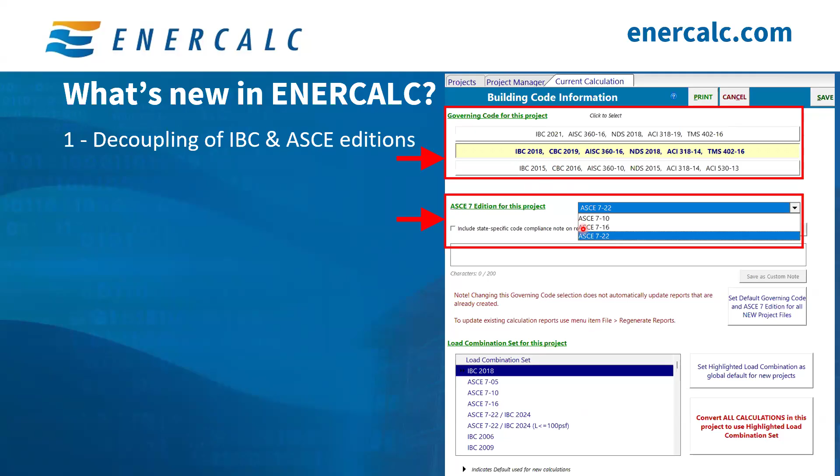So the third exciting update that we want to talk about is native load linking within ENERCALC. So hopefully this is familiar to some of you, but if it's not, load linking gives the user the ability to automatically link reactions from one calculation to another, and the ability to change something in one member and then have those changes trickle down to all the supporting members.

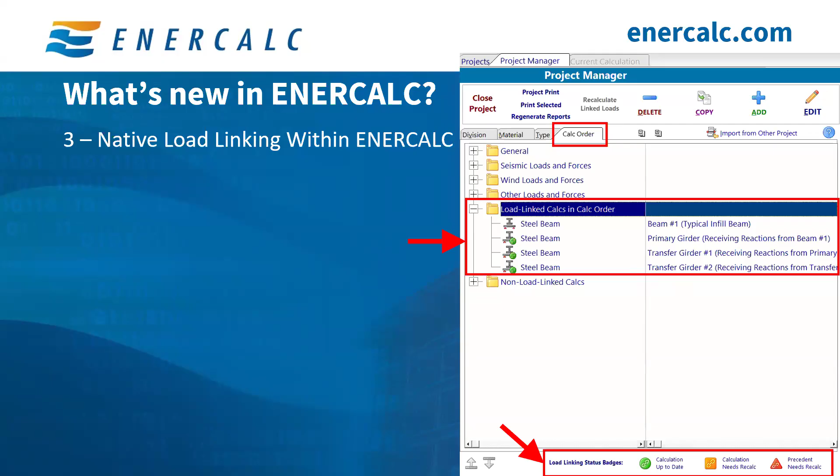So you can link multiple reactions from multiple members at the same time, and ENERCALC is going to understand the load path logic and ensure that all calculations are performed in the order that they should be. And then at the bottom of our screen, we can see these load linking status badges. So these are going to help you navigate the status of each calculation and understand the warnings better.

So for example, if we were to update our beam number 1, we'd see that the linked calculations would turn from green to orange and red, indicating that a recalc is needed because these calculations are out of date. And we can do this by clicking this new Recalculate Linked Loads button up here. If we click this, it'll allow us to bulk recalculate all of the calculations to ensure that the most up-to-date reactions are being used and that their effects are trickling down to all the related members downstream.

So I just want to jump into a steel beam calculation module real quick. If we're in a steel beam calculation module, we can see this new tab called Linked Loads. And in this tab, we can grab reactions from whatever calculations we have in our ENERCALC project file, and then apply them to our current beam that we're working on. And as we cycle through these calculations, we'll get to see this 2D diagram representation of the member that you're looking at to help refresh your memory. And this can help give you some confidence that you're choosing the correct member to link.

And then once you've picked a member to link and you go and select a reaction, you can determine how you want the reactions to be applied to your current member. So for example, you could choose to apply linked loads at midspan, third points, quarter points, a specific spacing, or a specific location. And then all of your linked reactions are going to be down here. And you'll also see any linked reaction is going to be blue in your 2D diagram over here.

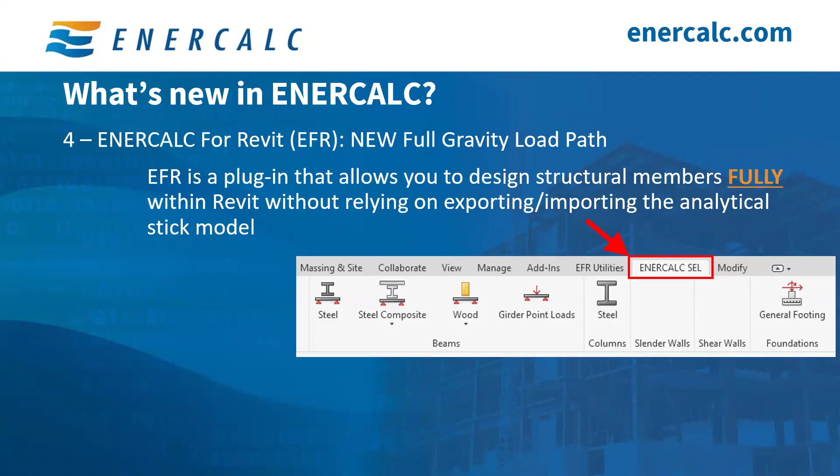And now the final feature that we wanted to highlight today is our ENERCALC for Revit Full Gravity Load Path. So if you attended last month's office hour session, Seth took us through ENERCALC for Revit, which is a Revit plugin that allows you to leverage ENERCALC SEL to design structural members fully within Revit without having to export information to another calculation software.

So ENERCALC for Revit previously supported steel beam, steel composite beam, wood beam, and girders. And now it also supports steel columns and general foundations. So this completes the gravity load path for a steel structural member. So let's take a minute to watch this in action.

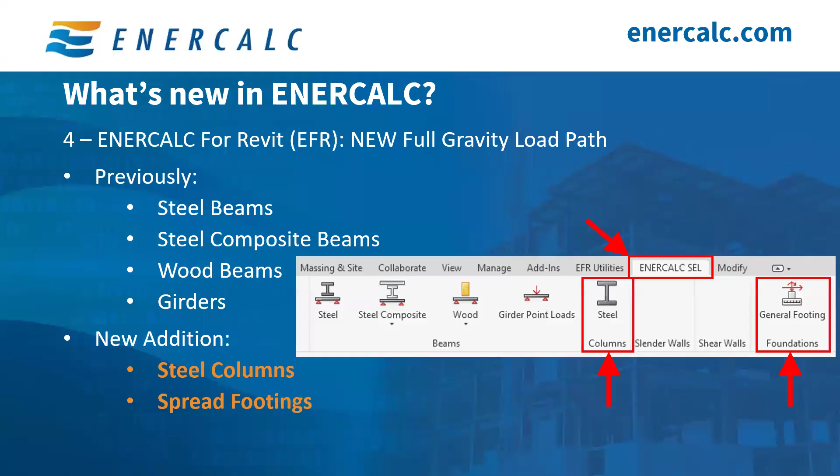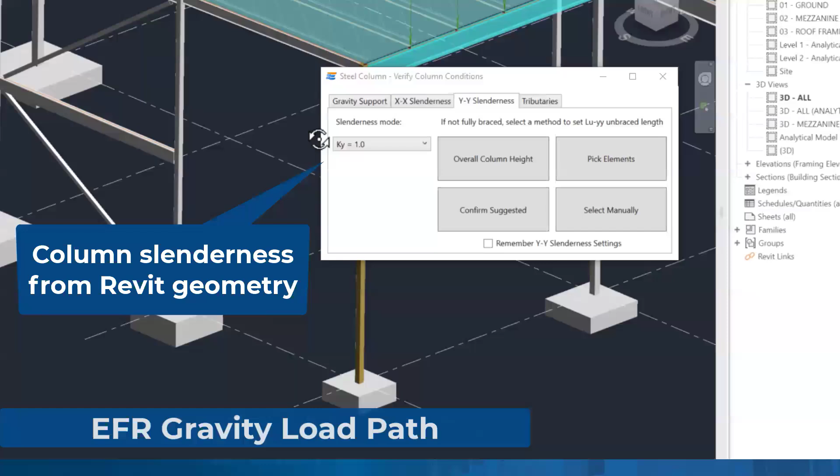So here we have our Revit model, and we can navigate up to the ENERCALC SEL ribbon, and we can select column design. And then we can pick our steel column that we want to design. We can confirm our gravity support conditions. We can confirm our slenderness inputs in both the X and Y directions. We can indicate if any elements are bracing our column that we're designing. We can confirm tributary loads.

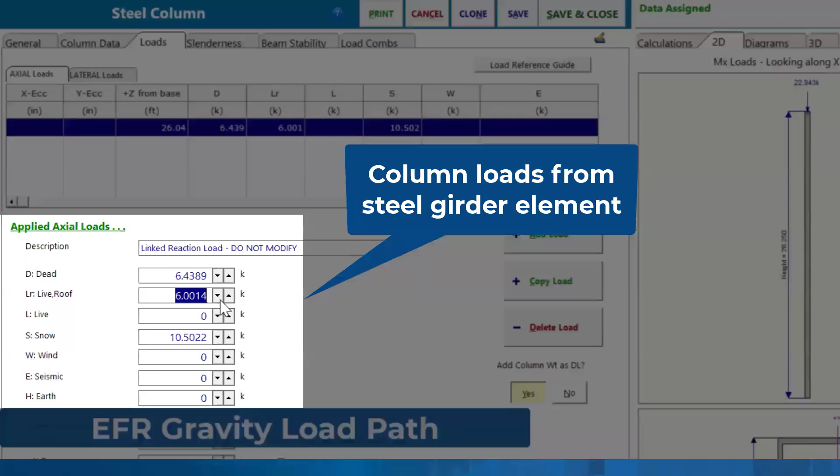And then once everything looks good and we click OK, the program's going to open up an ENERCALC calculation. And all of the information from Revit is going to be pre-populated. And so this will include your column size from Revit. It'll include applied loads that are coming in from Revit. You'll also see column geometry, column height will be included in here.

And once we go through this calculation, we like what we see, everything's working well. We can click save and close, and we'll be taken back to Revit. And we can see that our column size will automatically be adjusted to match our current calculation. And then we can use the same point and click logic for the foundation.

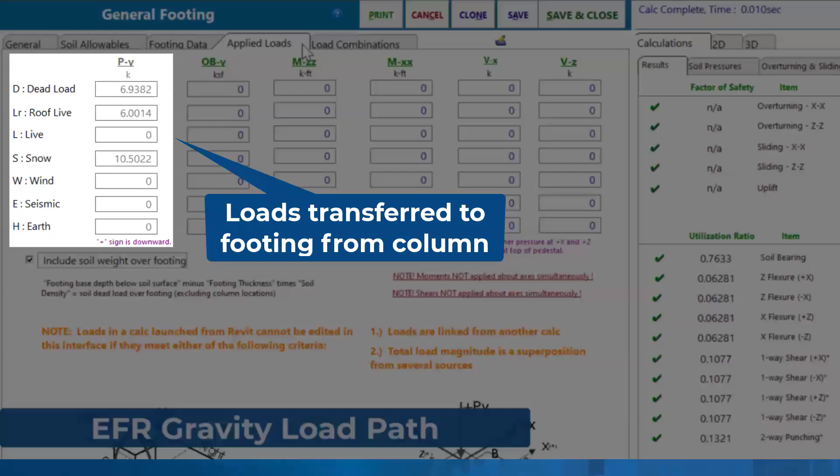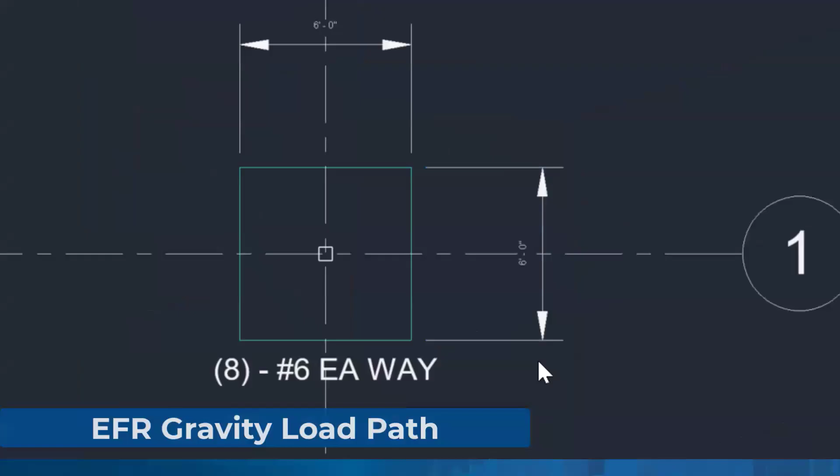So you can hop in here, you can make any adjustments to your design parameters you need to. You can see the loads that are coming in from Revit. You can update your footing geometry and your reinforcement information as needed. And then once we click save and close, we'll see that those changes are going to get carried over into our Revit model. So our footing size is automatically updated to match our calculation. We have reinforcement information here in Revit. And so we have this seamless conversation between Revit and ENERCALC SEL.

And so if you have an ENERCALC for Revit license, you can go to our For Our Users page, and below the update for ENERCALC SEL, you can install the latest version of ENERCALC for Revit, so you can start to leverage the full gravity load path for steel members.

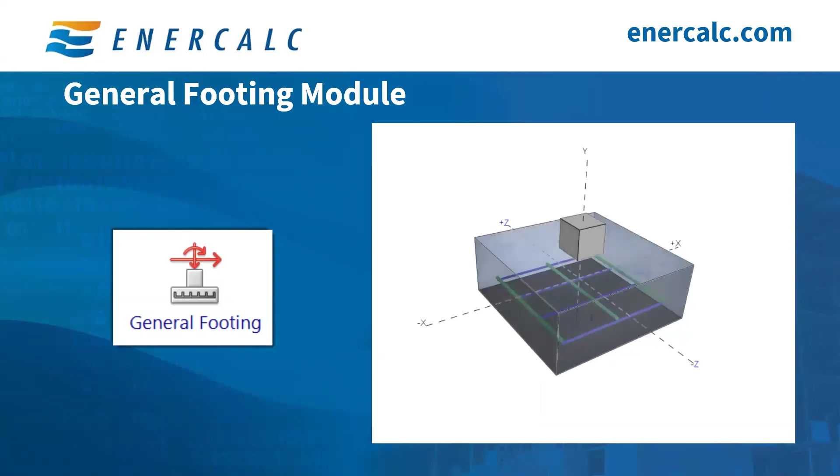So moving on, the focus of our session today is going to be the design of general foundations using the general footing module in ENERCALC. So we're going to cover this module's capabilities and limitations by walking through an example together. So here's just a quick overview of the capabilities and features of the general footing module. So the best use of the general footing module is for the analysis and design of rectangular footings with applied axial overburden, moment, and shear loads.

And this module is going to allow the user to choose to perform or not perform biaxial analysis as needed. And this module will also check soil bearing pressure, overturning stability, sliding stability for service level demands, as well as flexure, one-way shear, and two-way shear for LRFD level demands.

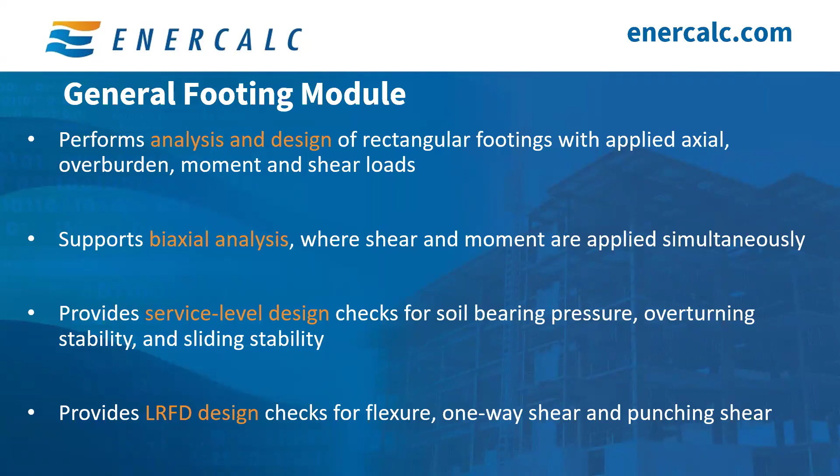So for today's example, we're going to pretend that we've been asked to design a rectangular pad footing to support a steel column, and our steel base plate is going to sit on a 12-inch square, 6-inch tall pedestal, and we've determined these applied loads. And our design is going to be based on IBC 2021 and ACI 318-19. And I'll be mentioning some differences between ACI 318-19 and ACI 318-14 as they come up.

So let's jump into our ENERCALC program. We can start a new footing calculation by clicking Add, navigating to the Foundations tab, and then clicking our General Footing module. And then we're going to start with our inputs in our General tab, and we'll be working our way from left to right through our inputs to set up our calculation. And so here on our General tab, we can give our calculation a unique name, and then we can jump into filling out all of our inputs down here.

So before diving into these inputs, I do want to mention that throughout today's example, I'm going to be referencing default values. So as some of you know, ENERCALC does allow users to set default values for various parameters, such as f'c, Fy, and phi values. And if you're following along in your program, you might notice that some of your default values might differ from some of the ones I'm showing. So it's just always good to double check that the defaults that you have in your program are applicable to your current calculation. And if for any reason you'd like to modify your default values, you can always do this in the Settings tab.

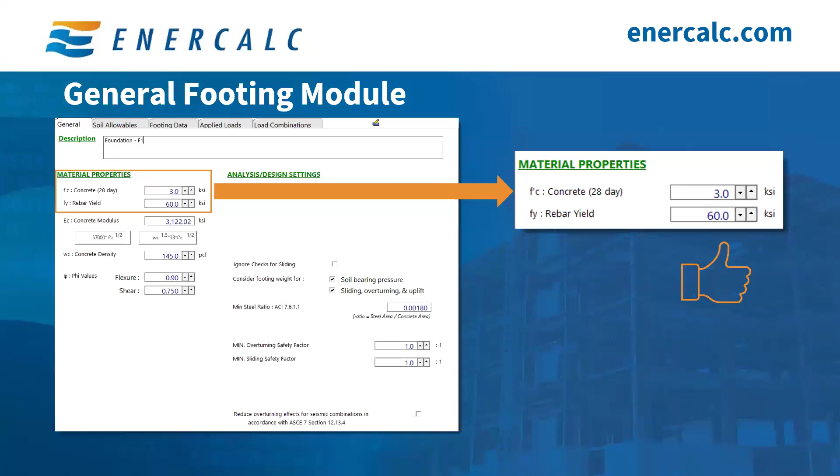So for concrete modulus, the user can either manually input a value here, or they can use one of these buttons to calculate the concrete modulus based on the F prime C input that we have up here. So to save myself some time and the effort of grabbing my calculator, I'm going to use this far left button to calculate my concrete modulus.

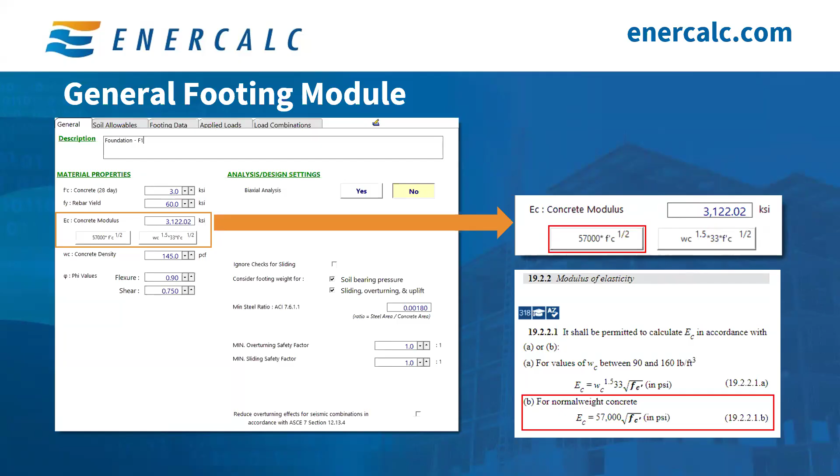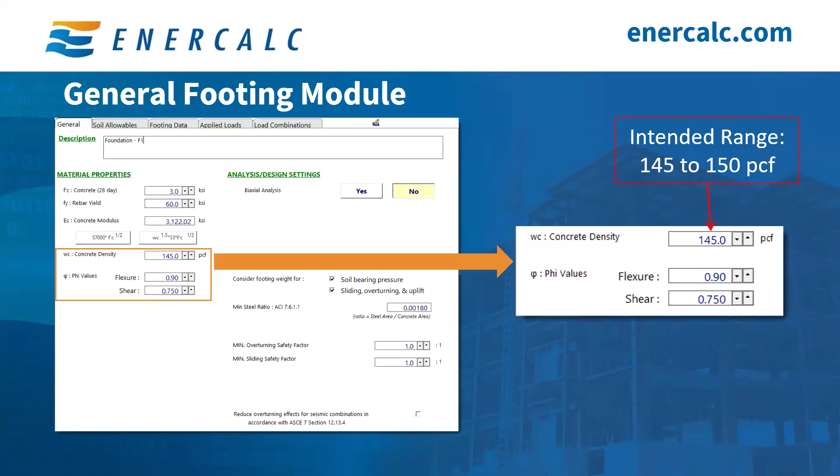And then moving on, we can see I have some more defaults here. As the engineer, it's always good to just come in and verify that these are still appropriate for your project. I would like to note that since code modifications for lightweight concrete are not applied in this module, the purpose of this concrete density input is to mainly allow the user to specify something between the 145 to 150 pounds per cubic foot range. So just keep that in mind when you're updating this. And continuing with our example, I like these default values, so I'm going to move on to my analysis and design settings.

So as I mentioned before, this module allows the user to choose to perform or not perform biaxial analysis as needed. And because biaxial analysis involves a lot of iterative calculations, rerunning the entire analysis and design every time we tweak an input would be inefficient for the program. So if we were to choose to run biaxial analysis, we'd see that the program would automatically switch to manual recalculation mode. And we'd notice that we have this click to calculate button that appears in the top right-hand corner. So anytime you change an input, the program is going to prompt you to manually recalculate by clicking this button.

And also when biaxial analysis is selected, an additional input is going to appear here below. And this input is going to specify the fraction as a decimal of the footing dimension from the edge to use when calculating moments and shears. So that means a smaller value here is going to result in a more conservative design because it's going to focus on a narrower strip where soil bearing pressure is going to be the highest.

So for example, if I was going to input a value of 1.0 here, I would be telling the program to base the calculation on the average pressure along the entire footing edge. While if I was going to put a value of 0.1 here, I would be telling the program to focus on the average pressure along the most heavily loaded 10%. So you can toggle this up and down and use your engineering judgment to decide the soil pressure that is best to use for your design. But for today's example, we're going to keep it simple. We are going to select no for biaxial analysis, and we're going to move on.

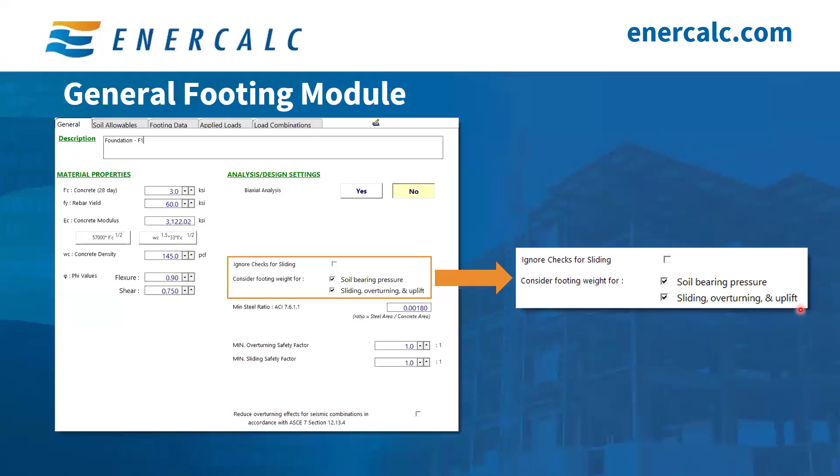And then the next checkbox is for the footing weights to be considered for sliding, overturning, and uplift. So again, when this box is selected, the module is going to calculate the self weight of the footing and apply it as a downward load when determining sliding, overturning, and uplift. And again, the self weight is going to be multiplied by the dead load factor in each of these stability load combinations.

So next up is our minimum flexural steel ratio. You can see that our default value here of 0.0018 per ACI 7.6.1.1 is already included. I would like to point out that this minimum ratio is for flexural steel. This is not a minimum ratio for temperature and shrinkage steel.

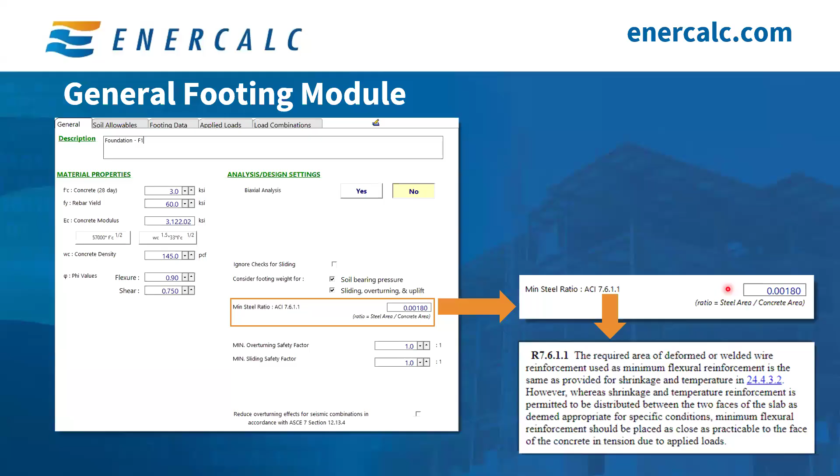So this means if your footing has net uplift and you needed to provide both a top and a bottom mat of reinforcement, this ratio would apply to the area of steel provided in both the top and bottom mat. So this is not something that can be shared between the top and bottom mats like temperature and shrinkage steel. And this is explained further in the commentary in ACI shown here.

So moving on to our safety factor inputs, you can see my default safety factor here is 1. Of course, you can revise this if you'd like to, but I like these, so I'm going to keep them.

Now, if your design is based on the requirements of ACI 318-14, you will see an additional minimum reinforcing check here in the general tab. And ACI 318-19 has clarified that the calculation of minimum flexural steel for footings is based on 0.0018 and not sections 9.6.1.2 or 9.6.1.3. So the option to consider these sections is removed when your governing code is set to IBC 2021 or later.

Okay, our last input on the general tab. This is for the selection to reduce overturning effects per ASCE 7, section 12.13.4. For our example, we're going to leave this unchecked, but it's always good to pop in here and see if you meet any of these conditions so that you can take advantage of that overturning effect reduction.

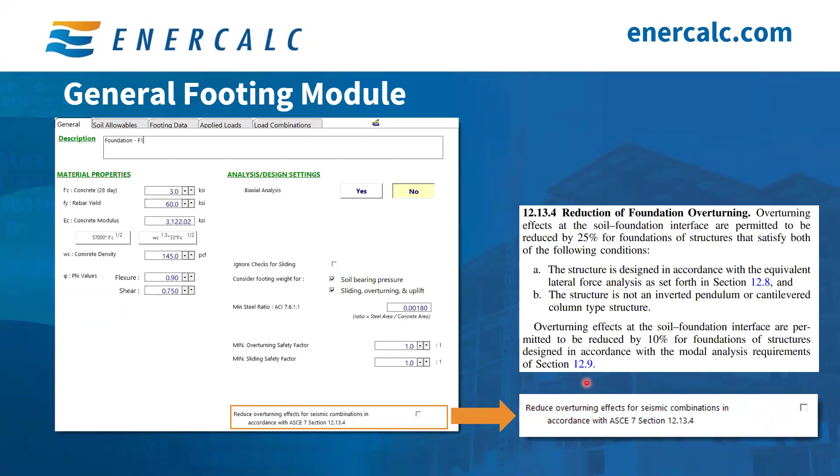Okay, moving on to our next tab. We're going to define our soil allowables inputs here. So first up, we have our allowable bearing pressure, and we can either manually input an allowable bearing pressure here, or we can use this sweet presumptive values from IBC button over here to select a value from table 1806.2. And for our example, I'm going to click this button and select 2 KSF.

And then next, we're going to confirm or revise our soil density and define the depth of our footing base below the surface of the soil. For this example, I'm happy with our default density, but you might be able to revise this based on information from your geotech report. And then for footing depth below soil surface, I'm going to start with my footing at 1 foot below.

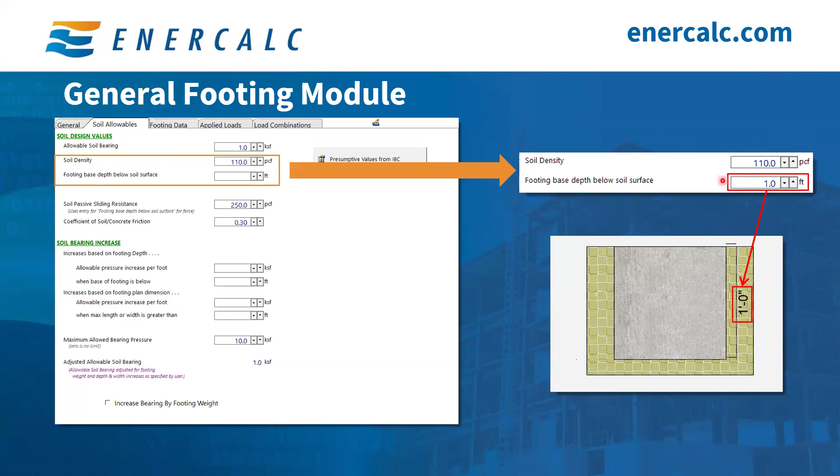So next, we can confirm or revise our passive resistance and friction coefficient. So one thing to note here is that the sliding resistance due to passive pressure is going to be added to the sliding resistance due to friction to determine the total resistance to sliding for each load combination. So if your geotech report has any limitations on using both passive and friction resistance together, you would have to adjust these values to satisfy those geotechnical requirements. But surprise, for this example, I am happy with these defaults.

So moving on to the soil bearing increase section, this section is going to allow you to specify dimensions that, if exceeded, will automatically increase the allowable soil bearing pressure. So I'd like to pause on our steel column foundation example for just a minute so we can take some time to dive into each of these inputs so we can understand what ENERCALC would do with information that we entered in here.

So let's look at increases based on footing depth first. I think it'll be easiest to explain these inputs with a quick hypothetical scenario. So we're going to say that our geotechnical report states that a 0.15 KSF increase in bearing pressure is allowed for each foot of depth when the base is deeper than 4 feet below the top of soil.

And we're going to say that we have a footing base that is 6 feet below the top of soil. And our allowable bearing pressure we entered up here is 3 KSF. So once we input the parameters from our geotech here, we'll see that our allowable bearing pressure increases from 3 KSF to 3.3 KSF.

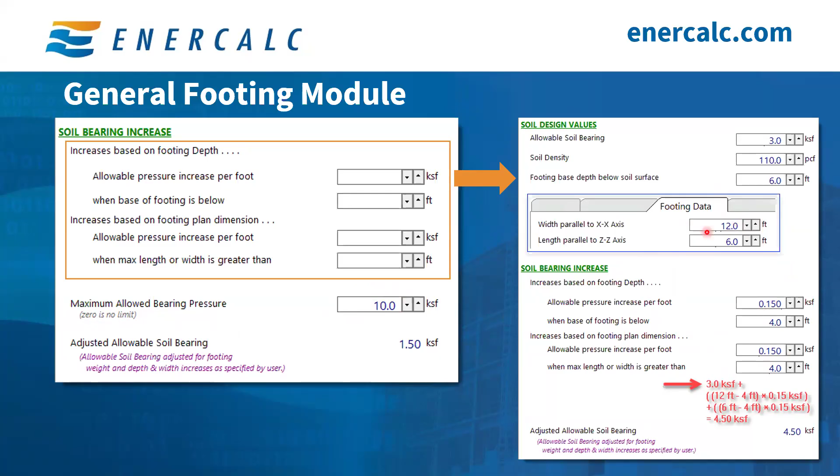And we would expect that if our geotechnical report allowed some increases based on footing depth or footing plan dimension, the geotech would also specify some maximum allowed bearing pressure. So we can input that value over here. And this is going to be our upper limit on the soil bearing pressure that will not be exceeded regardless of the increases that we specify over here in this section.

So jumping back to our steel column foundation example, we are actually going to assume that we do not have a geotechnical report. So we'll be leaving this section blank and we're going to move on. And now the last input on this tab is the checkbox for increasing bearing by footing weight. Now this is what we mentioned during the general tab's input. You might want to select this if you're trying to compare soil bearing pressures to net allowable pressures.

So when you select this box, the module is going to calculate the weight of 1 square foot of footing, and it'll add it to the allowable soil bearing value. And this adjustment is going to prevent the soil from being penalized for the footing self-weight, which could be useful when the geotechnical report provides allowable net bearing pressures. But as I said before, we don't have a geotech report, so we're going to have to leave this one unchecked.

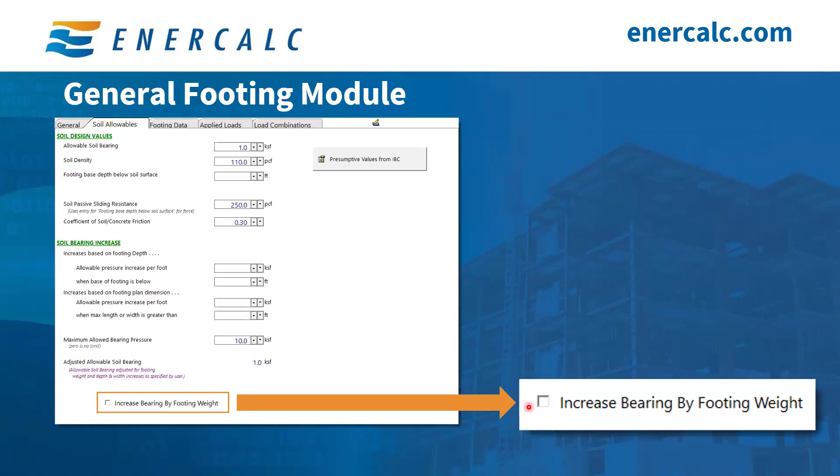And then moving on to the next tab, we can see I have some default values here for footing dimensions. I'm actually going to leave most of these defaults alone for now because I would like to input my loads and then come back and use this AutoCalc footing size and thickness button. But before we jump into that, I want to input our pedestal dimensions in here. So we go ahead and we input our pedestal dimensions, and then we can specify whether the self-weight of the pedestal should be considered when determining soil bearing pressure and when performing checks for sliding, overturning, and uplift.

And if you do not input any pedestal plan dimensions, then the load location will be treated as the face of the pedestal when determining these critical locations. So now that we've defined our pedestal dimensions, we're going to put a pin in this tab and we're going to jump over to our applied loads.

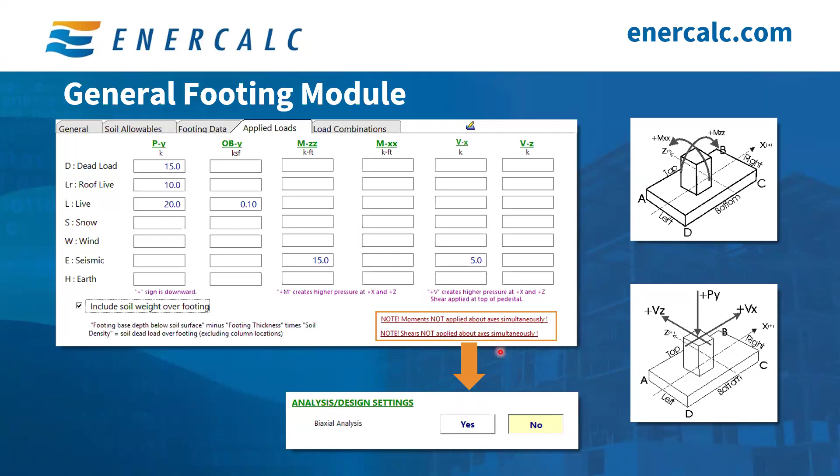So jumping to the next tab, load combinations. This tab is hopefully quite familiar to all of you. This is a pretty consistent tab throughout all of ENERCALC modules, so we're not going to spend a lot of time here. But I do want to point out that the load combinations in the LRFD tab are going to be used to calculate moments and shears in the footing for use in determining stresses and required reinforcing. And the combinations on this tab are going to be at the strength level.

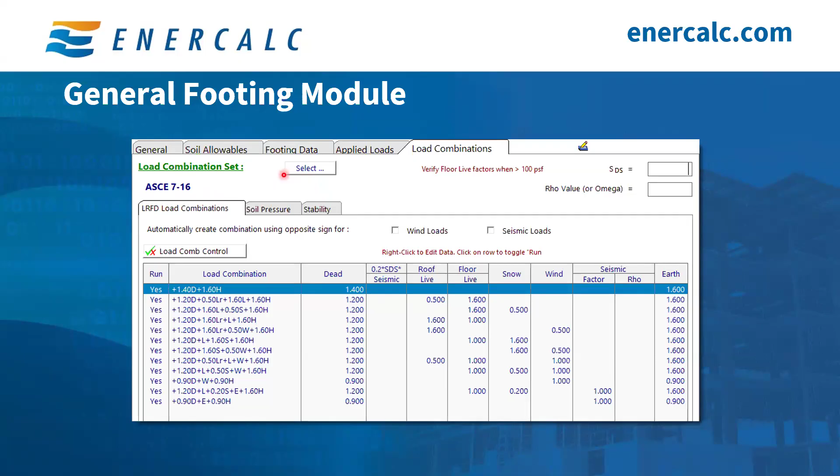And then the load combinations in the other two tabs are going to be at the service level, and they'll be used for checking soil bearing pressure and sliding and overturning stability. So now that we have our applied loads and we're happy with our load combinations, I want to jump back into our footing data tab. So for this example, we don't really have too many restrictions on footing size and footing depth. So instead of manually inputting width and length dimensions, I want to use our nifty AutoCalc footing size and thickness button down here.

So when we click this button, it opens up this menu and we can see we have two options. We can choose a square or a rectangular footing shape. But before we do that, let's discuss these notes down here. So the AutoCalc footing size and thickness button is going to provide us with suggested footing dimensions to satisfy soil bearing pressure and overturning, as well as a suggested footing thickness to satisfy 1- and 2-way shear.

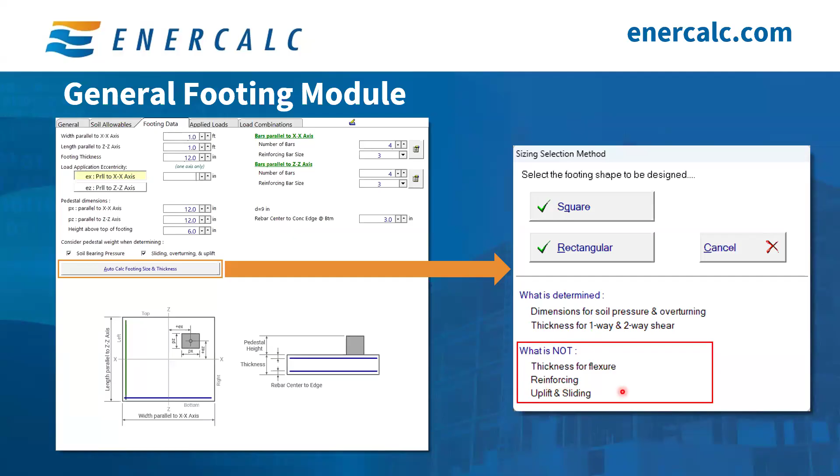But these recommended footing dimensions may not fully satisfy the requirements for flexure, uplift, sliding, or minimum reinforcement. So we might notice that after we run this auto calculation, we might need to adjust our footing dimensions and reinforcement inputs to make sure that all of our design checks are met.

So back to our example, we're going to choose rectangular footing, and then let's see how quickly this AutoCalc button determines an appropriate footing size. So we click our button, choose rectangular, and bam, we have a footing design in just a few seconds. So I really like this feature. As a young engineer in design, I often struggled with not always knowing where to start when it came to determining footing size and depth. And this button provided a quick solution. It allowed me to arrive at a reasonable starting point with just one click, and it still gave me the flexibility to revise the footing as needed.

Now, if you're still with me, you might have noticed that I said starting point and not final footing design. And that's because we still have a little bit of work to do here. So I want to take a look at our AutoCalc dimensions, and I just don't really love these. So I'm going to make some adjustments, and then I'm going to see if I can make these new dimensions work by adjusting my reinforcement.

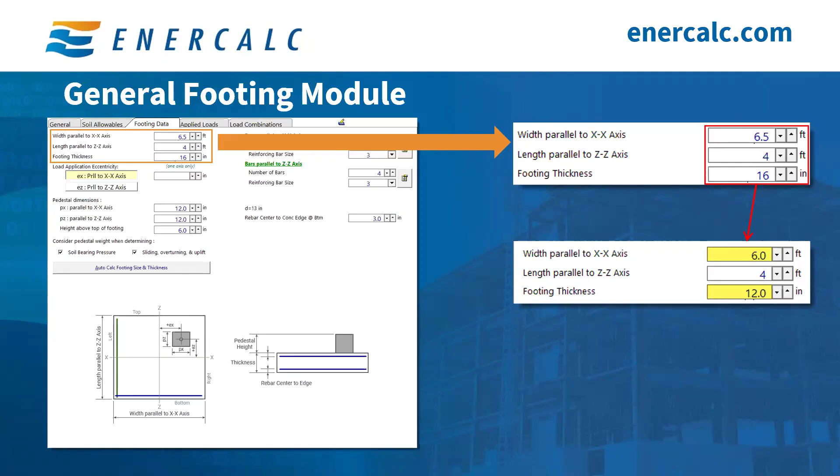So we have our updated dimensions here, and then over to the right, we have all of our outputs. And we can see that we've satisfied most of our design checks, but we have not satisfied minimum reinforcement or one of our one-way shear checks. So let's revise our rebar inputs here, and let's see if we can resolve these.

So we update our reinforcement to 4 number 5 bars parallel to XX and 7 number 5 bars parallel to ZZ. And then we confirm our edge clear cover down here. And we can see that we're now satisfying all of our design checks and our footing design is complete.

Now, before we move on to our results tab, you might have noticed that this bandwidth distribution check appeared in our window when we selected a rectangular footing design. And this check references ACI section 13.3.3.3. This section requires a higher percentage of the reinforcement to be concentrated in a strip of footing closer to the applied load. So we're not going to dive too deep into this check today, but it is important to note that the engineer should confirm that their detailing does satisfy this ACI requirement when they have a rectangular footing.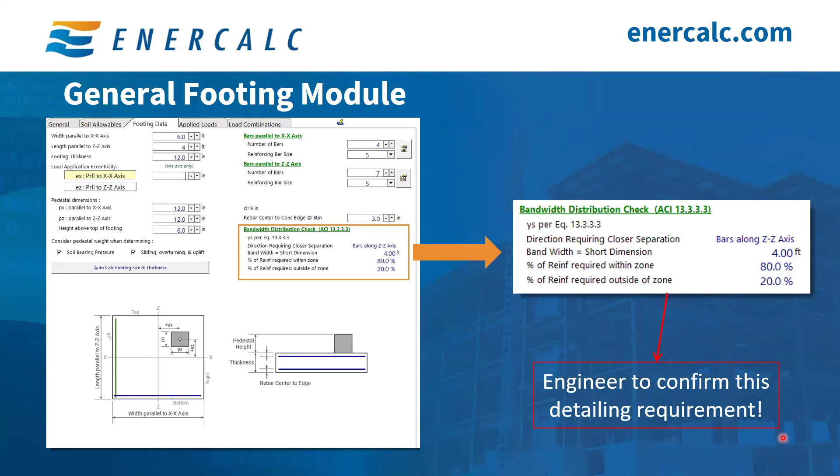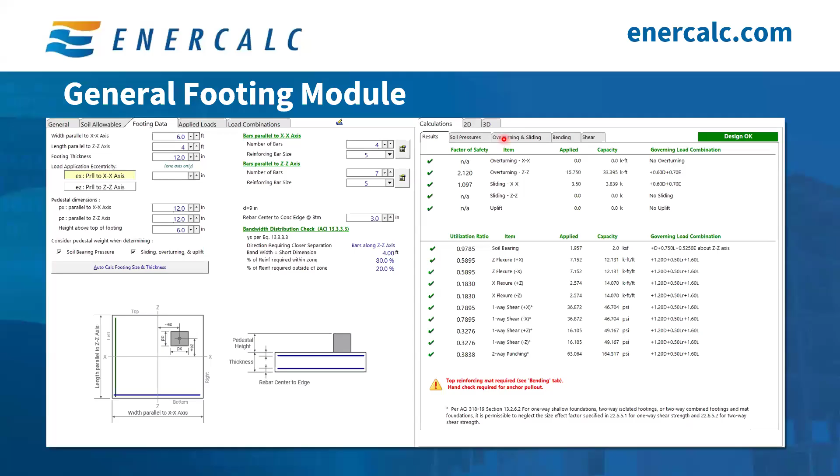Okay, so now we have a design that works, and we're going to go through the output side of the screen. We're going to start with our results tab. So here we have a general overview of all the design checks that the module has done to verify our footing design, and we'll dive into each of these in a little more detail as we navigate through the calculations tab. But first, let's discuss these two notes that have appeared here at the bottom.

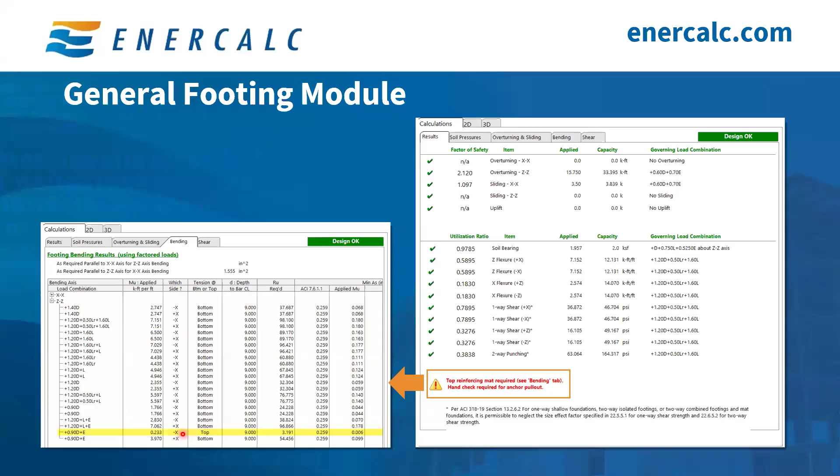So first, we can see this red note here, and it's telling us that a top reinforcing mat is required. And if we pop open our bending tab over here to the left, we can see that since we have an applied seismic bending moment, we have tension in the top of the footing for one of our load combinations. So back when we specified our reinforcement in the footing data tab, we told the program what reinforcement we wanted for the bottom mat of our footing.

Now, if there's tension on the top surface of our footing, ENERCALC is going to assume that the same number and size of bars is also provided as a top mat. And it's also going to assume that the top clear cover is the same as the bottom clear cover that we specified. So we do understand that this is a limitation of this module, and it can be a little bit confusing for the user, and we are working on updates to improve this.

But for now, it's important that you understand that if there is tension on the top of your footing, the program is going to assume that the top and bottom mat both match the inputs you specified here in the footing data tab. And if this assumption does not match your design intent, you might need to run some additional checks to confirm your design. And this note also serves to remind the user that since there's tension in the top of the footing, a hand calc is going to be required to check anchor pullout to verify that the anchors and our reinforcement connecting the column to the footing are adequate.

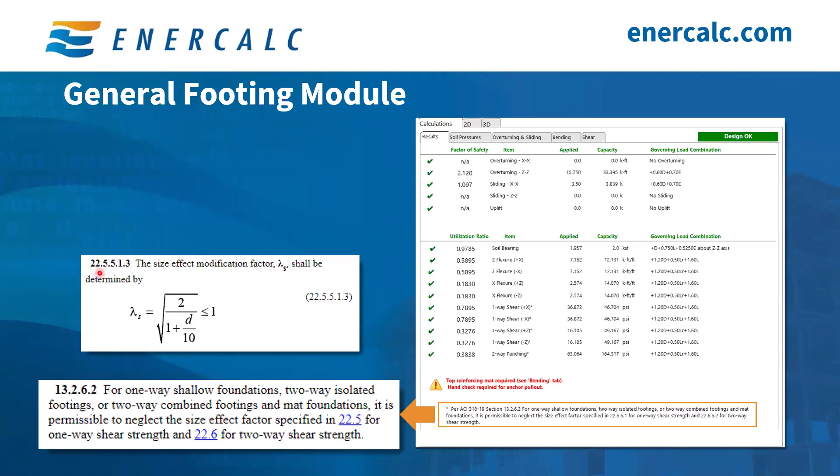So the next note we see here references ACI 318-19 section 13.2.6.2. And if you're familiar with the ACI 318-19 updates, you know that ACI has added a new size effect factor here to the shear capacity equations. However, section 13.2.6.2 states that for certain foundations, the size effect factor can be neglected. So ENERCALC takes advantage of this by setting the factor equal to 1.0 in the one-way and two-way shear calculation equations.

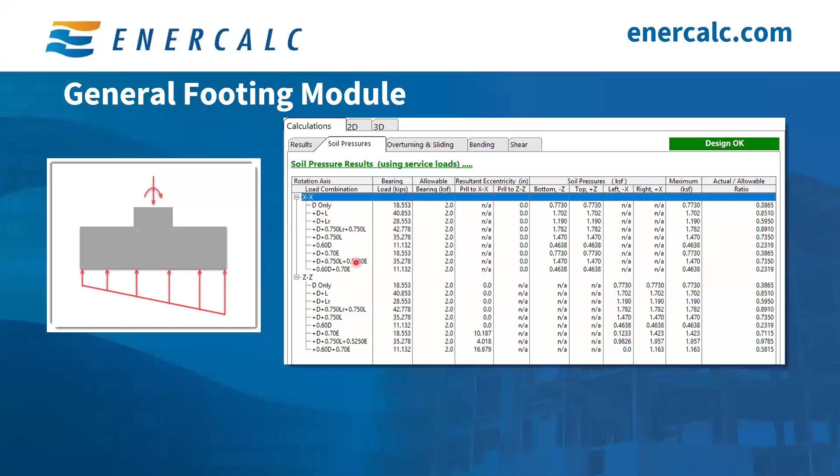Now, as we navigate from left to right in the calculations tab over here, we can see detailed design results for the various design checks that the program performs, starting with the soil pressures check, which compares the applied service loads to the bearing pressure capacity for our soil below the footing for each load combination. Next, we have our overturning results, showing the detailed design results for the overturning stability checks. The demands here are going to be at service level.

And in this tab, we have our sliding results, showing detailed design results for the sliding stability checks. Again, the demands here are going to be at service level. And as we discussed earlier, the sliding resistance due to passive pressure is going to be added to the sliding resistance due to friction to determine the total resistance to sliding for each load combination.

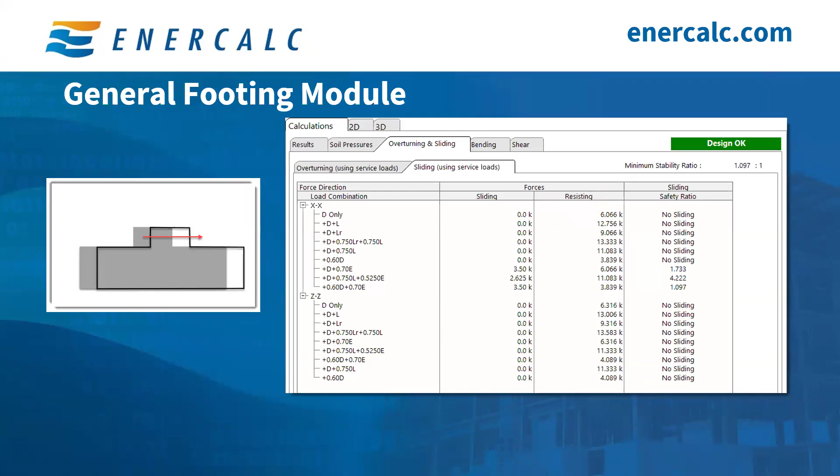Moving on, we can see detailed design results for the bending design. These calculations are going to compare LRFD level demands and capacities to confirm that the flexural reinforcement we specified is adequate. And one thing to note here is that the critical section is going to be the face of the pedestal we defined. And if we had no pedestal defined, then the critical section would be the location of the applied load.

And then in our final calculations tab, our shear tab here, we can see detailed design results for our shear design. So similar to the bending tab, these calculations are going to compare LRFD level demands and capacities to confirm the footing depth and reinforcement provided is adequate. And for one-way shear, the concrete weight modification factor and size effect factor are both going to be assumed to be 1.0. And the critical section is going to be d away from the face of the pedestal we defined. And again, if there is no pedestal defined, the critical section will be d away from the location of the applied load.

And quick note here, if you were to toggle between ACI 318-14 and ACI 318-19 designs, you might notice that one-way shear capacity for footings is going to be lower in ACI 318-19. And this is due to code updates in Chapter 22 and the new one-way shear equations.

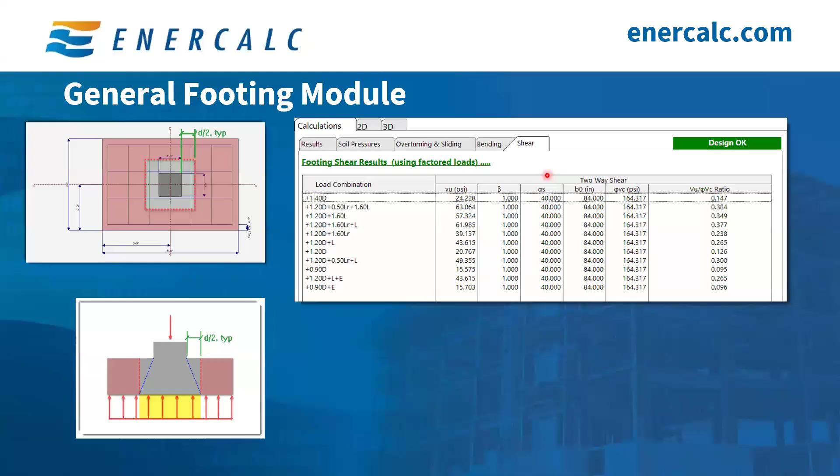So in the shear tab, if we scroll over, we can see our two-way shear information, and the critical section for two-way shear is going to be d/2 away from the face of the pedestal we defined. And again, if we don't have a pedestal defined, it'll be d/2 away from the location of the applied load.

And then one thing I just wanted to note here is that the punching shear demand is not going to be calculated using the full applied load on the footing, like you might do if you were doing a quick hand calc. Instead, the two-way shear calculation is going to exclude the portion of the load beneath the pedestal that's transferred through direct compression. So only the load from the soil pressure within this red highlighted area is actually going to be used in the two-way shear calculation.

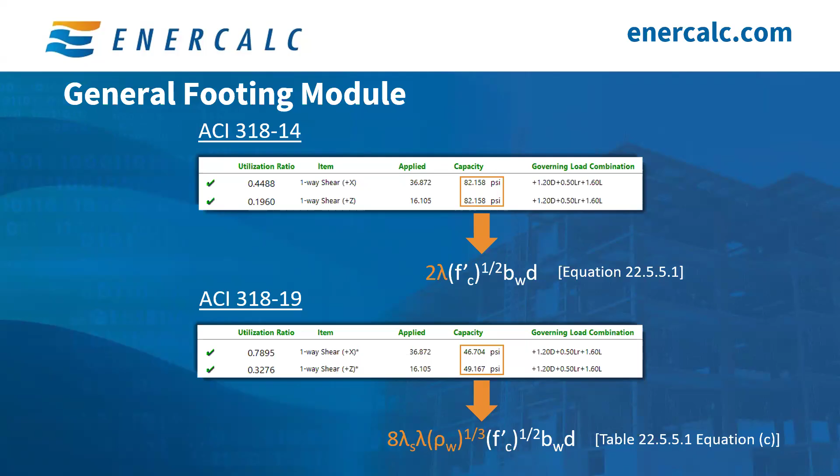Question from Pavel. If no pedestal is being defined, what critical parameter is being used for the two-way check? Mm-hmm. And I think you kind of touched on the answer to that one, but go ahead. Yeah, we can look at that. If we do not have a pedestal defined, then the critical location is going to be d over 2 away from the location of our applied load. So if we didn't have a pedestal here, our applied load would be right here in the center of our footing, and we'd be d over 2 away from that location.

So it can get quite conservative depending on how large your pedestal is. That's why if you have, say, a steel base plate or something, it's good to define pedestal plan dimensions when they're applicable to your design. Perfect.

All right. Let's see.

Another question: is the soil allowable bearing pressure increase permitted in IBC 2021? If so, do you have a reference to the section, chapter 18? If not, is this permitted if recommended by the project's geotechnical engineer?

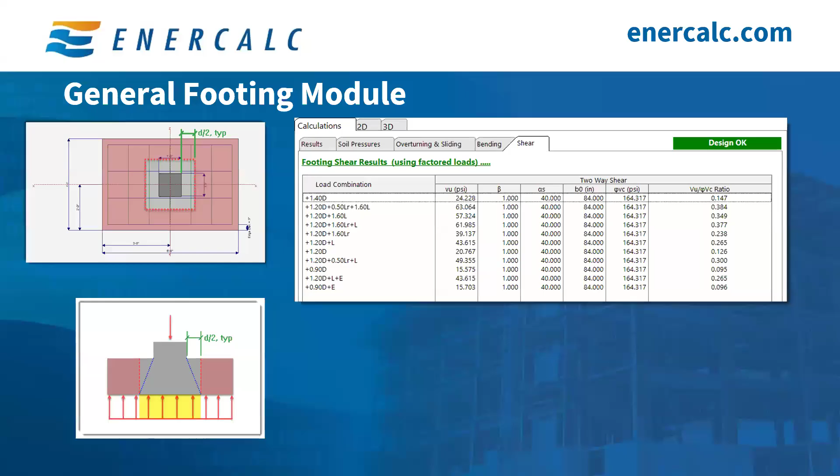Great question. So some provisions like that are not explicitly based in IBC allowances. Sometimes those are just based off of standard practices often found in geotechnical reports, because we want to allow our engineering users to accommodate a wide variety of different project conditions. And so we do have those options if for some reason you have a geotechnical report that says, for however much you go deeper, you can increase your bearing capacity and so on.

Let Chelsea go ahead if you have more thoughts on that. But that's not an explicitly IBC driven provision. It's a flexibility feature that we provide in case you have a situation where that's called for.

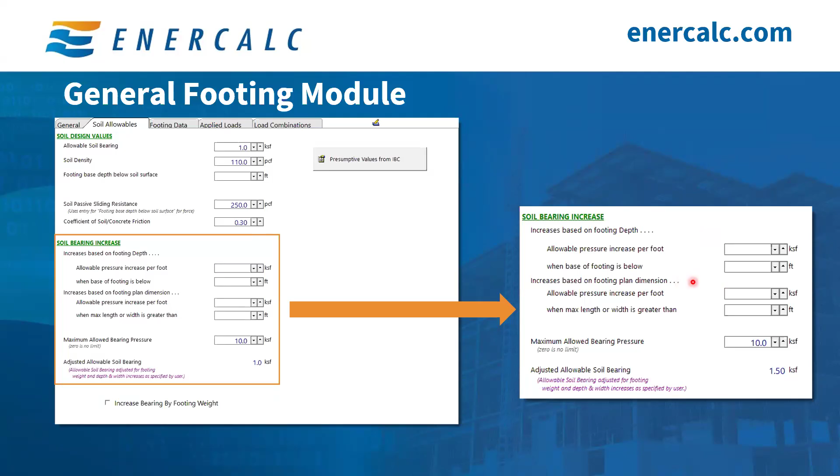Yeah, I'll just note I've never seen this come through in a geotech report. I've never been given the luxury of some increases in soil bearing pressure, which was why I thought it would be good to really dive into what this does and what this means in today's presentation. So yeah, I think that just coordinating with your geotech on that is probably the recommendation.

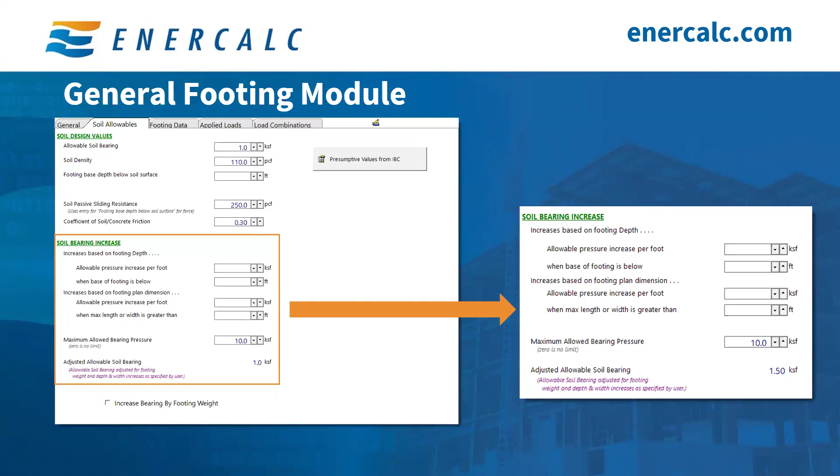All right. Question about load linking. Is there a ballpark timeline for adding the linked load feature to wood design? So, as many of you know, and we've highlighted in our previous office hours sessions, we do have a survey on the load linking tab where you can actually go in and vote about features that you want to see next when you want to see load linking added to other modules.

Wood beam to wood beam load linking and wood beam to steel beam load linking is one of our top responses on that survey, and so that's definitely in progress right now. We don't formally announce timelines for things like that because software development is an iterative process and it's hard to predict the exact time where that's going to be available. But we definitely know that that's something people are interested in. It's with the development team making progress right now.

Can you clarify your comment about the top rebar mat? Does ENERCALC assume it's there but graphically not display it? Yes, I can. Let me jump back to that section here. Okay. So, yes, if you see this warning come up, and if you see tension in the top of your footing when you're looking at your bending results, ENERCALC is going to assume in the bending check that there is a top mat provided so that it can check that tension in the top of your footing.

But we are not currently displaying that reinforcement here. We've just said that we're doing that by showing this note here. And another thing to note, sometimes when people see this note, they think that their design is failing. We can see here that our design is still okay. We just have this note that is reminding us that we do need to provide a top mat in our drawings. And then we also need to check anchor pull out for that tension in the top of the footing.

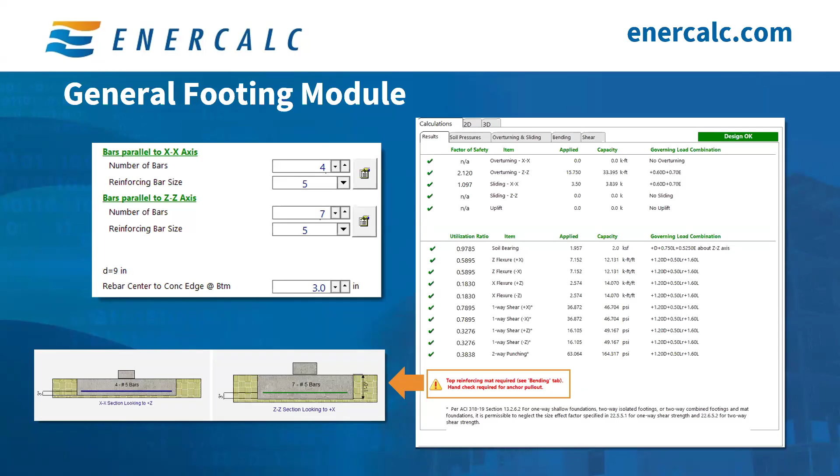All right. Going back to the base plate and pedestal questions: if you're not installing a base plate on a pedestal concrete pier, should we leave the pedestal dimensions as blank? If you're not installing a base plate on, can you read that again? I'm sorry. Yeah, so I think they're basically talking about a situation where you're just wanting to design quickly with a concentrated force, but you're not considering actual base plate or pedestal type dimensions, in which case I think you would be simply leaving those inputs blank.

Yeah, if you don't have like a concrete column, a pedestal, like a masonry wall or anything that you can define the plan dimensions, then you can always leave those blank. And then the program's just going to assume that your critical location is going to be that location of the applied load. This would just be conservative if you did, like for our example, we had a 12-inch square pedestal. And if we ignored that, then we'd see that our critical location was pushed to an area with higher force, and we would have had a little bit more of a conservative design when we were looking at

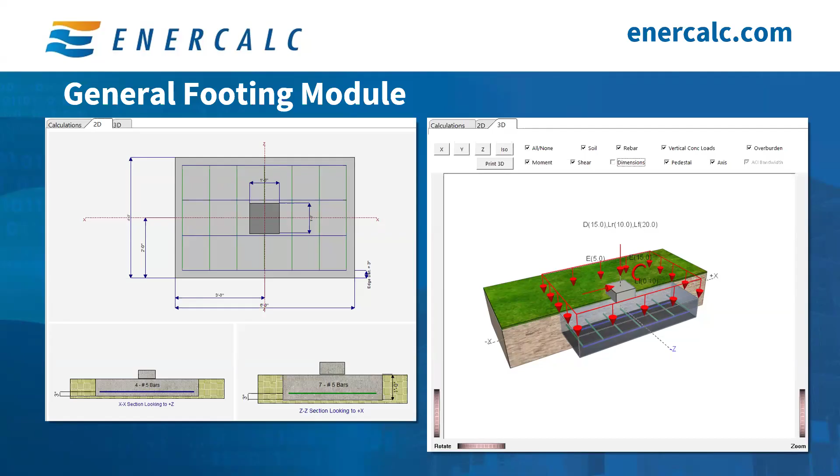our results. Right. So we can fair to say that leaving the pedestal dimensions as 0 gives you your most conservative result for punching shear checks. Yeah, punching shear, yeah. So if you wanted to just do a quick check, it'd be great to leave these blank, and then you'll see that upper limit. But yeah, there's a table in ACI and it has the location of critical sections for different supporting members. So if you have a supported member in this table, then this is the place that ENERCALC allows you to define those things.

All right, next question. How is the continuous footing under the wall modeled in general footing module? So we will probably have a future office hours session regarding continuous wall footing design. So we're not going to dive into that one today, but definitely feel free to reach out to the support team if you have specific questions or concerns about continuous wall footing module questions.

Let's see, another question. How well is load linking working? Are folks having smooth use of them? Yeah, I would say if you haven't tried out load linking, you should absolutely get in there and start using it on your projects. Definitely a huge time saver, both on the transcription side, the accuracy side, and then if changes ever happen in your load path, that workflow that Chelsea walked you guys through, where you're able to seamlessly connect one calculation to another, creates durable dynamic relationships between your different load linked calculations.

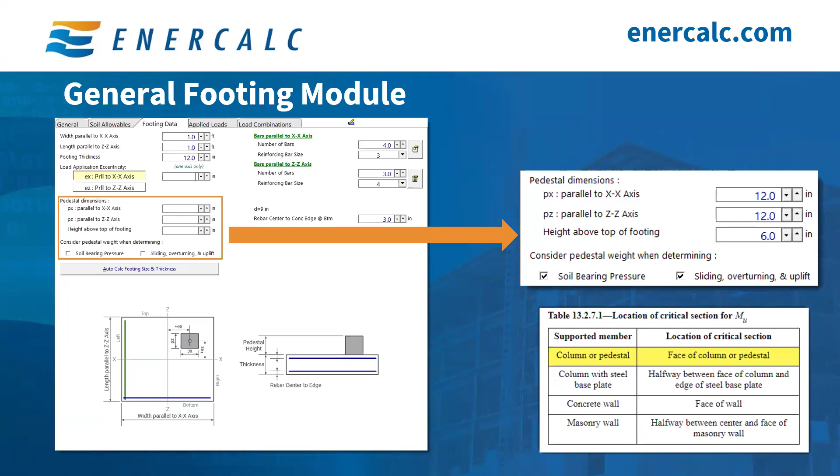Yeah, for sure. The other cool thing, if you guys haven't played around with load linking yet, the other cool thing about the load linking is like Chelsea was showing on the process of creating the load linked relationship, because you have the array of different ways you can apply those linking relationships. Let's say you have an infill beam and a girder situation where you've got third points or quarter points or some kind of arbitrary spacing.

Once you create those load linking relationships, all the controls remain dynamic. And so, let's say you reframe your floor and it goes from third points to quarter points, or it goes from third points to exactly 6 feet on center, or something like that. You can automatically make those changes in real time. It's going to rearrange all your loads and update the calculation.

Also dynamic geometry control if your span geometry changes. Let's say you've got a 23-foot span loaded at third points, all of a sudden that becomes a 36-foot span. You're still going to have third point loads. Everything's going to modify dynamically on the fly. So definitely encourage you guys to dig into that.

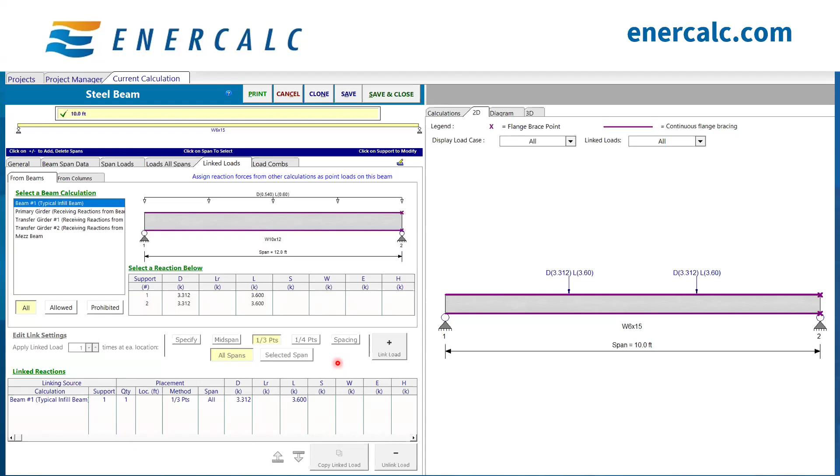Speaking of load linking, follow-up question from Mike. Do you get indications of members changing after you change something higher in the load path? Absolutely. If Chelsea jumps back to the status badges, you can go ahead and dig into his question if you want. Yeah, so let's say for example, I'm gonna change something in my transfer girder number one. This is providing reactions to my transfer girder number two, and it's receiving reactions from my primary girder above it.

So if I made a change here, I would see that my upstream beams, they don't change. Both of these status badges would remain green, but I would see that here, this transfer girder number two, that status badge would change to orange, and it would indicate to me that this calculation is not up to date. There are some loads being applied from the linked reactions that are not current.

And I can either come in and open this calc up and the program will communicate to update that, or I can come up and I can recalculate. I can bulk recalculate up here. If I have like 10 calculations that got updated, instead of opening each one individually, I can go and recalculate here.

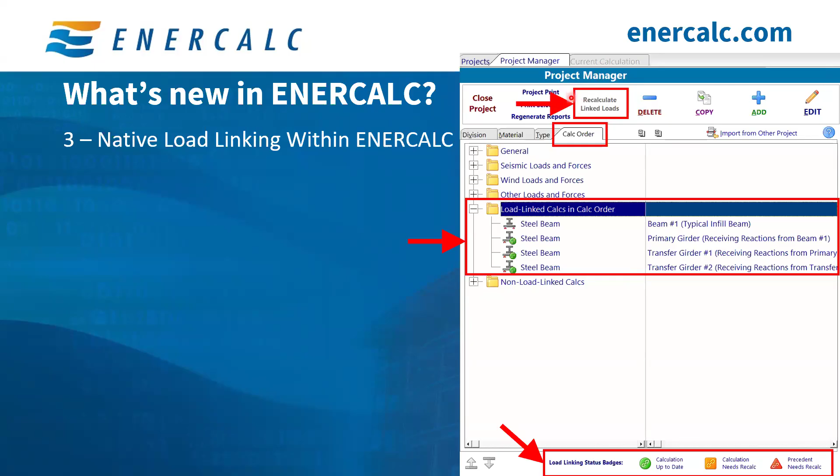I'm excited to hear that you guys are really interested about load linking, where it's a feature that we're really proud of and we're excited for you all to use. We're happy to answer any more questions here today, but also if you wanted to check out the status badges, they're explained really well in this video on our YouTube page. There's a quick walkthrough tutorial here. I think the runtime on this is about 26-ish minutes. And after you watch this, you'll be locked and loaded, ready to use this feature.

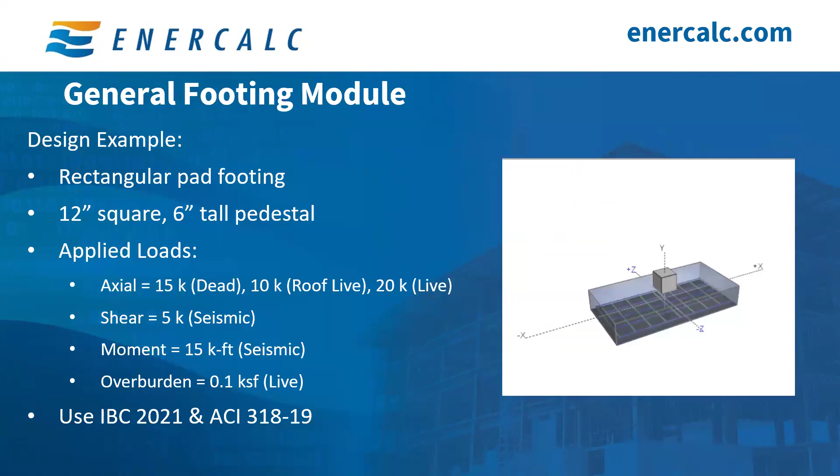All right. Question from Miguel. If I'm bringing the combined loads from another program like RISA-3D, how should I incorporate the loads, taking into account that they have already been factored? So when you're working with another program that's performing analysis and then you want to be able to go into foundation design, it's highly advisable that you try to output those reactions on a case by case basis from your analysis software so that you can feed those directly into the case by case input fields,

because all of those input fields are set up to use unfactored case by case inputs. It's conceivable you could customize your load combination sets if you wanted to build something that lets you feed seamlessly from raw outputs from another program, but you just want to be aware that the ENERCALC interface is explicitly set up to take case by case inputs.

Let's see. Another question about applied loads. A shear load applied at the top of the pedestal, the additional moment is taken to the top of the footing and not to the bottom of the footing. So, kind of another clarifying question about the nature of those applied loads. Chelsea, feel free to jump on that if you have thoughts about those applied loads. The diagrams you have up right now probably help answer that as well.

Yeah, so that additional moment that we're going to see from our shear load, it's going to be applied at the top of our footing. And then all of our calculations are run assuming that all these reactions are happening at the top of our footing. Yeah, and for moment in particular, an externally applied moment that you specify is just going to be a global stability moment on the footing itself. Globally, it's not specific to top face, bottom face, and so on. Hopefully that covers that question.

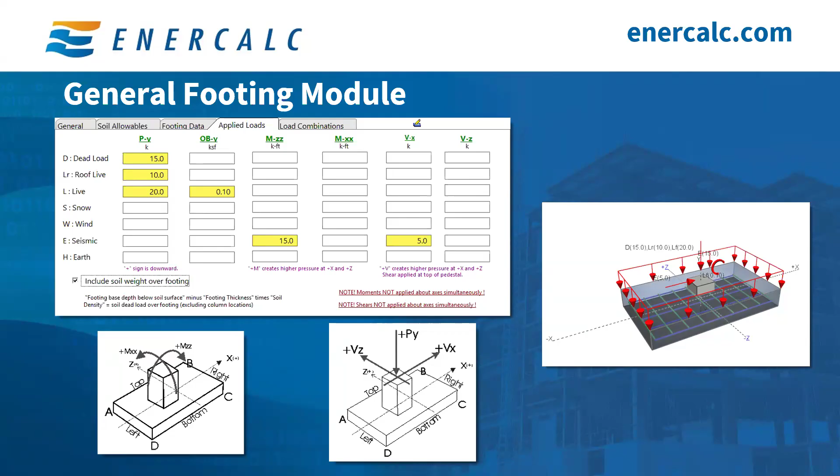Can you discuss the overturning and sliding settings on the general tab more? Using 1.0 seems like you would have no factor of safety for overturning. Sure. Let me pop that open here. I'll just open this general tab. Okay, so yes, I believe from my research that this is a hotly debated topic. You can update these to be whatever you feel they need to be using your engineering judgment or in discussions with your geotech. So 1.5 is another common factor of safety that we'll see here.

There is an argument to be made that because the load combinations have some factor of safety built into them, that maybe 1.0 is sufficient. But ENERCALC's goal is never to tell the engineer how to apply their judgment or how to interpret the code. We always just want to provide you with as much flexibility in our modules to apply whatever judgment you need to, and to use our modules in the way that serves you and your project.

So if you would prefer a 1.5 factor of safety here, you can go ahead and do that. You can also make that your default, so every new calculation has that factor of safety. This was just what I chose for the example. Maybe not what I would choose in a real life project, but yeah.